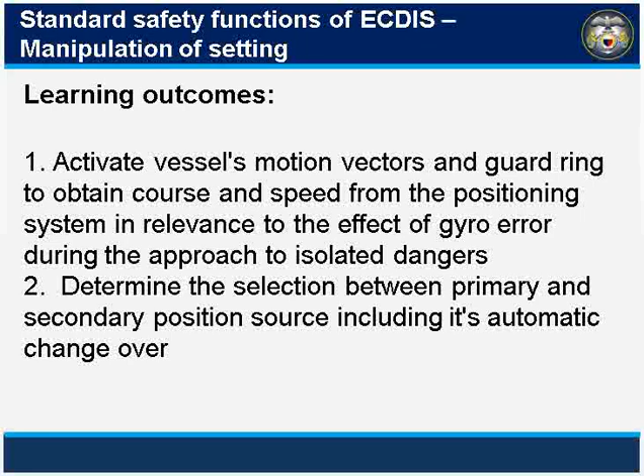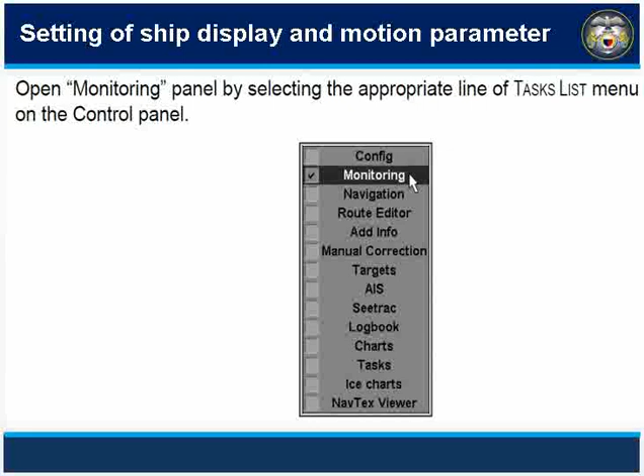Let's start guys. To open the monitoring panel by selecting the appropriate line of the task list menu on the control panel. So on the control panel, on the right, there's a task list. Just activate the monitoring. After that, the route monitoring page will appear. So in the monitoring panel, the route monitoring page is what we will use first.

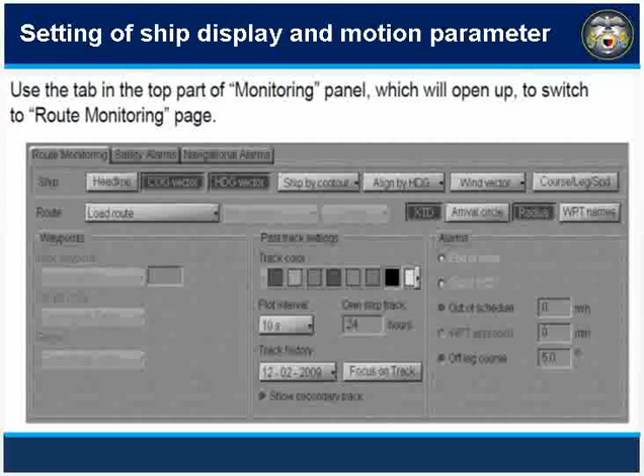Okay, here in the route monitoring page, here in the ship parameter, we can see the headline, display the course line, but usually we activate the course over the ground, and the heading vector, display vector motion relative to the water. That is the heading vector. And then we can select ship by contour and ship by symbol. So with contour, we can see the shape of the ship in relation to the scale. When the scale is zoomed in, you can see the actual size of the ship.

Okay, then we can have align by heading. You can align it to heading. And also, you can use wind vector if you want to activate it, you can see it. So you can also use course and leg speed once our course line, our route plan, is activated if loaded. We will see it too. If there's none, you also cannot activate it. So usually, what we use initially is course over the ground vector and also heading vector to compare the two. And you can also use align by heading and ship by symbol, those are what we activate.

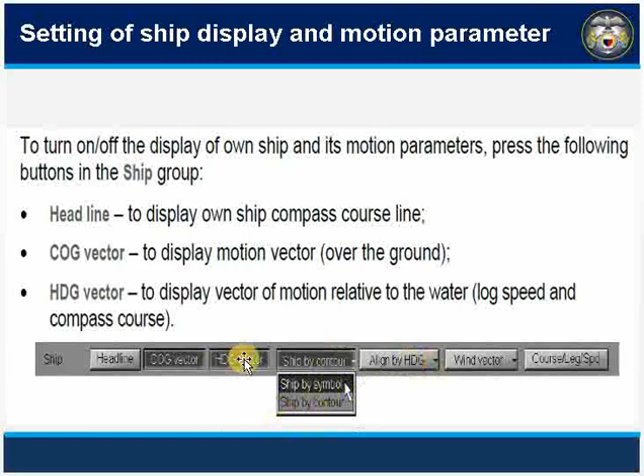Okay, so after setting that, we can also set the fixed length of the own ship and target vector. This is in the operational panel window on the control panel, at the bottom of the sidebar, lower right. At the bottom, fixed, then just set 6 minutes or 12 minutes, that's fine. It's good to use about 12 minutes vector.

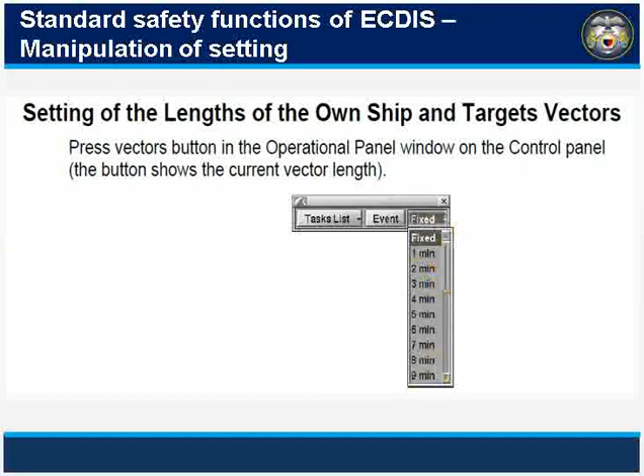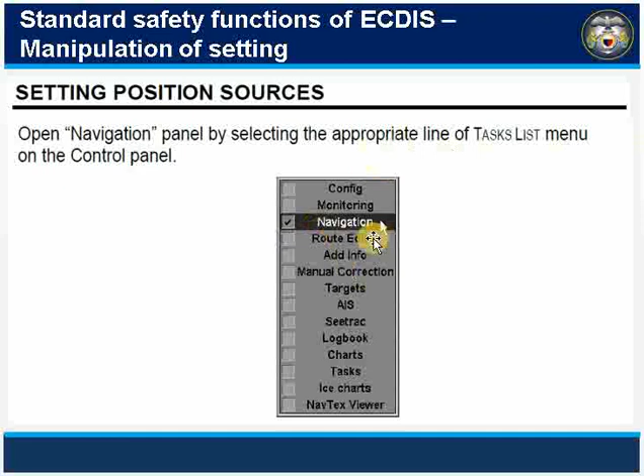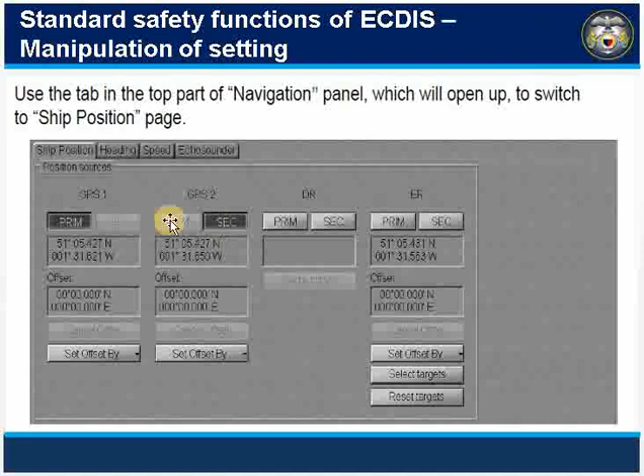Okay, then we can set the position source. The position source is in navigation. There are the sources of the sensors. So in the navigation panel, also in the task list, on the right, in the control panel, select navigation, then you will see the navigation panel, and you can switch to the ship position page. There, in ship position, you can see the setting of GPS 1, GPS 2 - always primary is GPS 1, and secondary is GPS 2. It's automatic. If primary fails, it automatically switches to secondary.

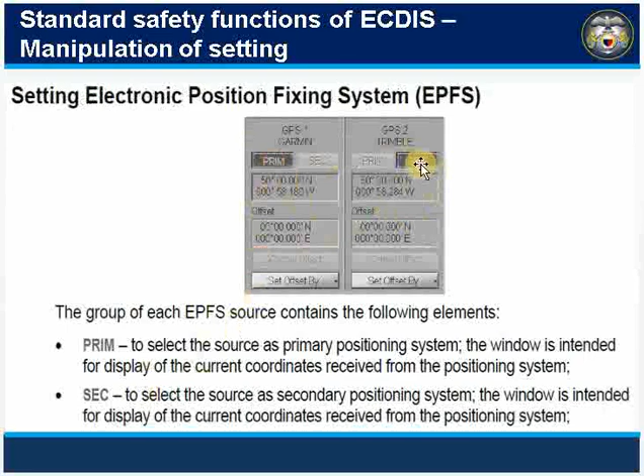You just need it selected as secondary. Then you will see it in your status, here in the control panel, on the right side sidebar. When you select the primary status, you will see it - latitude, longitude, GPS, position. The quality of the GPS, the source is there. After setting that, that's your confirmation that you are connected to the GPS.

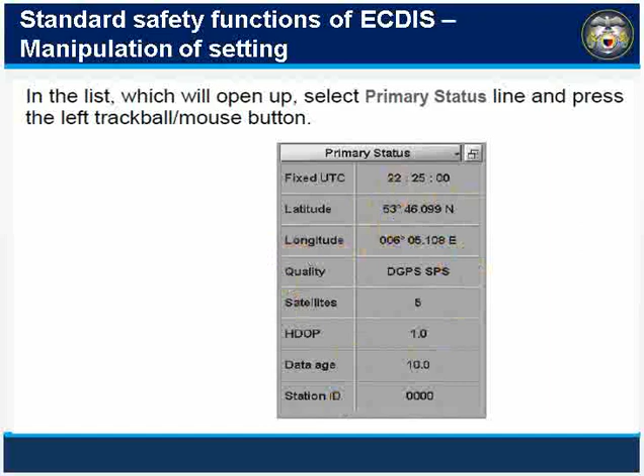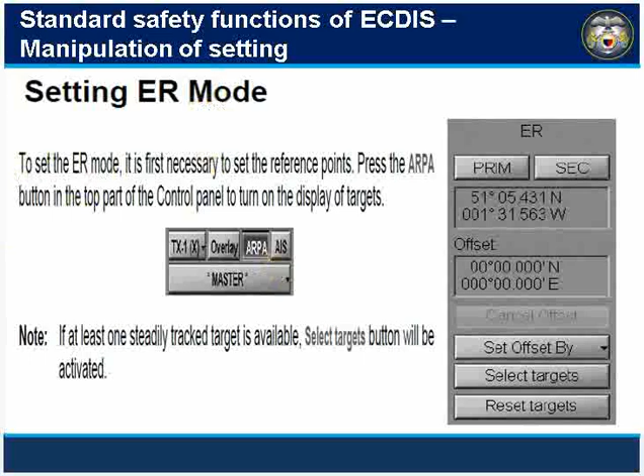And then you can also set the echo referencing - this is better shown in the laboratory. Of course it's secondary. If your GPS is primary, you can set that as your secondary. Also primary, if the GPS fails. And in order to use this, of course, you must activate the ARPA on the upper right of the control panel, ARPA. And of course, select your reference, which should be a steady target, so it can capture it, fix it. Now that's the echo referencing - demonstrated already in your laboratory.

And also the DR source, you can set it as secondary. If one GPS fails, you can make it secondary, or primary if both GPS units fail. That's all there is to it. Then it becomes automatic - it will do dead reckoning.

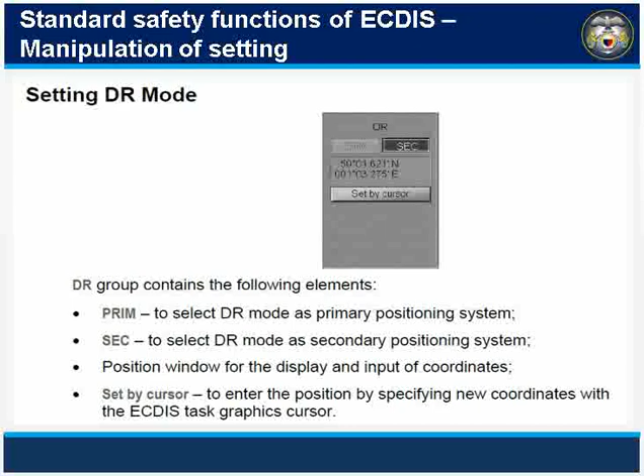And then, during navigation, we can have our manual fix position for determining position. This is very important because you can double check your position in relation to the GPS. On the right side, also in the control panel, in the display panel, activate the task there. Then in the task list, you will see manually fix - manual fix position. Once you activate that, the manual fix, you can have a line of position for the manual fix position of your ship.

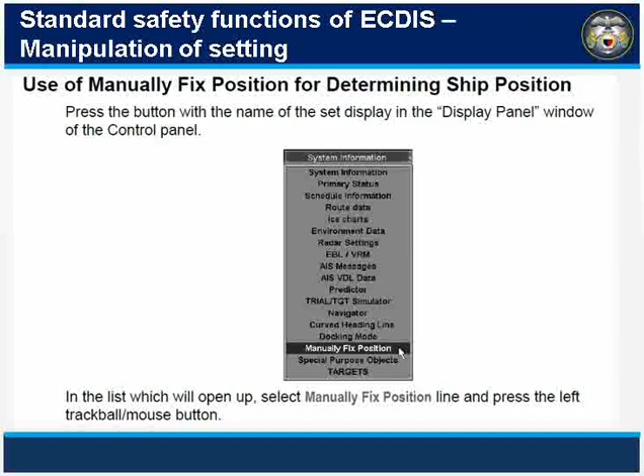Then this will appear on the list after manual fix position. You activate it, and then this is what will appear. It is still on the right side, sidebar, control panel. At the lower right, this panel will appear.

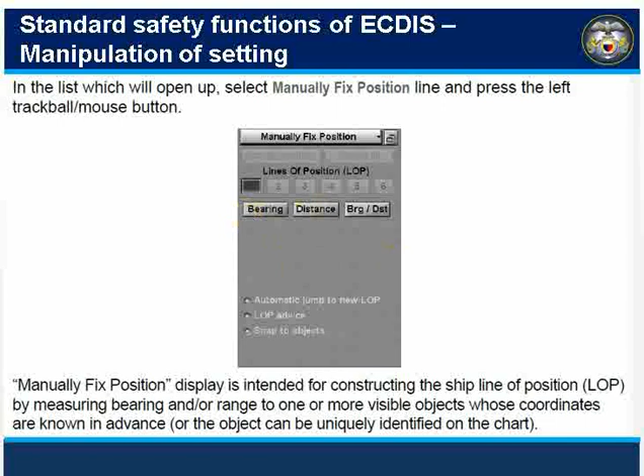So, when you select bearing or distance, you enter the bearing or distance, depending on what you did. Then you apply that.

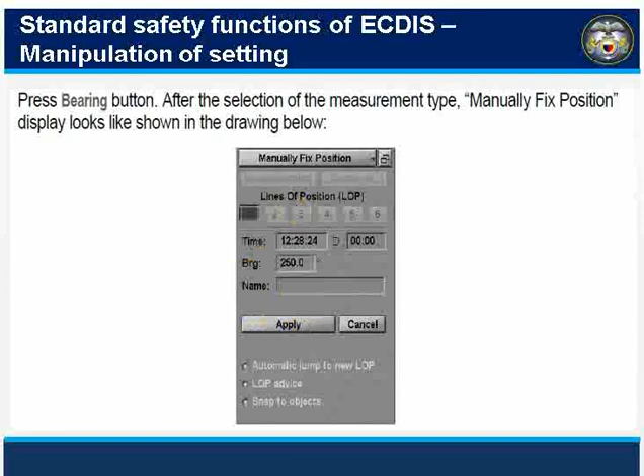I-reference natin siya, move and reference doon sa reference point mo bago siya gumuhit. So, it will be looking like this, guys. Pagka nagdalawa na siya, magkakaroon siya ng reference dito, estimated position na. And then, it will move to the next, number 3.

Okay, so yung automatic jump niya, yung LOP, dito lang yan pagka magsi-switch. So pwedeng i-deactivate yan para makita mo yung move and reference mo. Okay, mas maganda hindi siya naka-activate. Kasi babalik ka rin doon, i-move reference mo siya doon sa dulo, lalagay mo sa dulo, kung saan yung reference mo bago siya gumuhit.

Okay lang yan kung less than half mile. Pagka more than half mile, hindi siya kakagat, kaya magmamanual ka ng move and reference. Kung sakaling nagkamali, delete mo lang. So mag-automatic na siya, kung ilan yung time difference, mag-automatic na siya.

Okay, and then yung LOP advice, mag-a-advise siya rito. Kung may error, pupula yan. So ito, kung may error to, pupula. Ibig sabihin, malayo masyado yung kinuha na mo. Merong error yon, mali. Ibig sabihin, pag pumula yan, kailangan activated yung LOP advice.

LOP. Okay, yung snap to objects, mag-i-reference yan, automatic sa reference yan, pagka less than 0.5. Ayan, mag-i-snap yan. Kung less na, pag hindi, manu-mano ka ng move and reference. Yung automatic jump, dito lang yan.

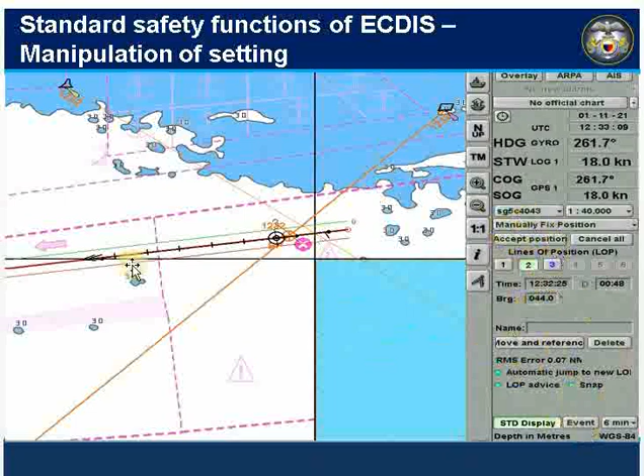Okay, so pagka distance naman ang kinuha mo, guys, ito naman ang magiging itsura niyan. So bilog naman siya. Yung mag-cross yung distance mo doon sa reference mo, ito naman ang ilalagay mong reference, yung gitna ng bilog, kasi distance yan. Yung kanina, yung dulo, kasi bearing, kung saan mo kinuha na reference. Then yung bilog niya nag-cross, yun ang magiging position, estimated position.

So this is better demonstrated, guys, sa inyong laboratory. I-demonstrate yan. Okay, and then after that, then you just continue. Merong, alam mo na, hindi ka naman nalalayo. Meron naman na nakalagay dito, error dun sa position mo. Ilan difference lang? Maliit lang, 0.07 nautical miles lang, so okay na yan. 0.2, hindi masyado nagkalayo siya.

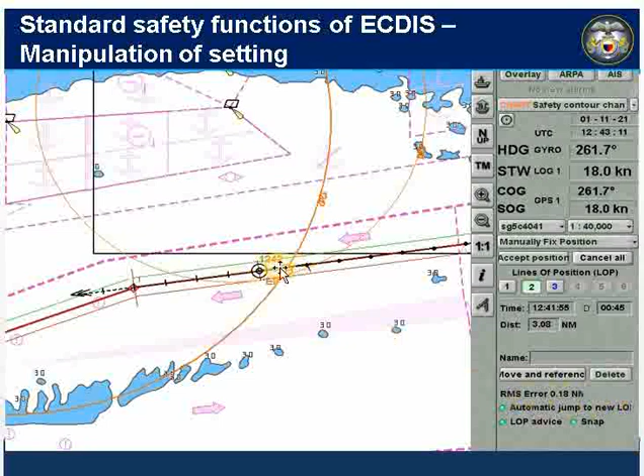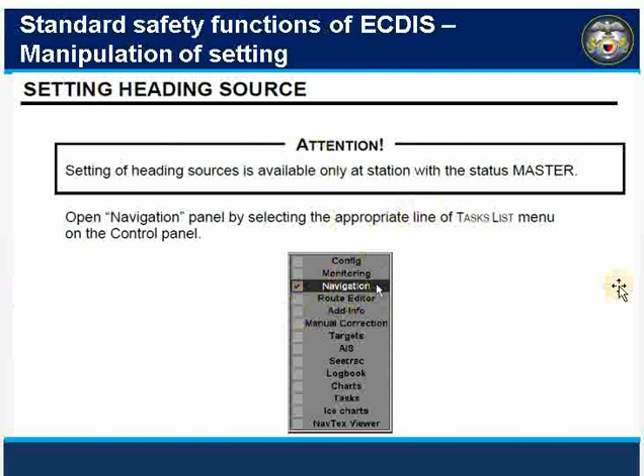Okay, and then we have another topic, setting heading source. Okay, doon din sa navigation, nandyan yung sensor niya. And then after that, sinelect mo rin, nandyan sa task list, sa kanan, sa control panel, navigation naman yung pinili mo. And then we have here the heading.

Ayan, so piliin mo lang yung ship position. Okay, kung heading source, kung speed, echo sounder. Okay, yan lang yan, so ano yung source mo ba? Ginagamit, sa heading, gyro. O yan, ito, gyro 2, kung may pangalawang gyro. Magnetic, kung mayroon kang reference sa magnetic. Okay, so yung pinaka-source mo, heading mo, is gyro, of course. Back up lang itong dalawa.

And then, we have the speed source. So ano ba yung pinagkukunan mo ng source mo, ng speed? Okay, speed log, ayan, speed through the water. Okay, ayan, then yung speed through the water, speed log, Doppler log, and then we have here the speed over the ground, GPS naman ang kinukuha natin yan, normally. Okay, pwede rin mag-Doppler log ka ng Simrad, o ito yung ship's log, speed log ng barko. Okay, so depende na kung ano yung available na nakakonekta sa ECDIS natin. Yun lang ang lilitaw, pag walang nakalitaw, hindi lilitaw yan.

Okay, so yung manual, laging meron yan. Pag bumigay lahat, enter ka manual speed. Dito yan. Okay, so pag bumigay na lahat ang sensor mo, ayan na yung pinaka last resort.

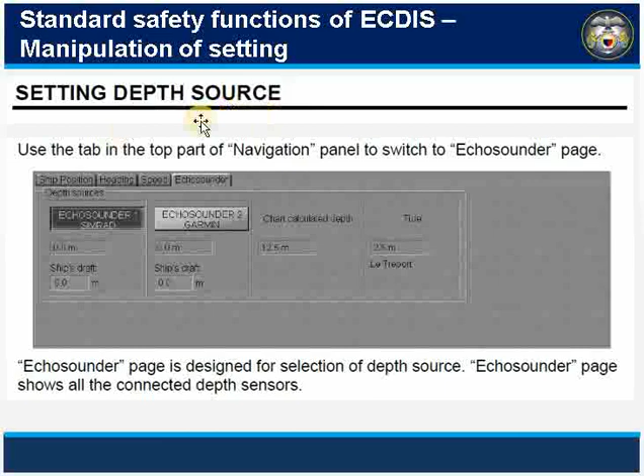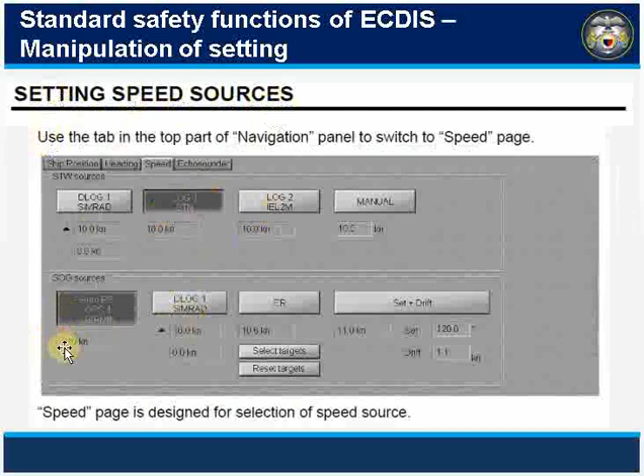Yan, hindi na kailangan yung procedure. So yung mga topic, setting depth source, ano yon? Echo sounder, yun lang. So kung ano yung mga na-discuss ko dyan, setting speed source, speed log, speed over the ground, GPS, yun lang, so no need yung step-by-step procedure. Mga topic lang and subtopic. Okay, so yun ang kailangan yung ilista. And then turn in nyo as your recitation, last recitation for midterm.

And then, tapos na yung quiz natin, so we have an assignment. Okay, yung assignment, naka-indicate naman kung anong page, anong module. Module 2 yan, week 11, kung anong page, saka exercise. Kung di ako nagkakamali, mga exercise 10 yan. Alright, so that's it guys.